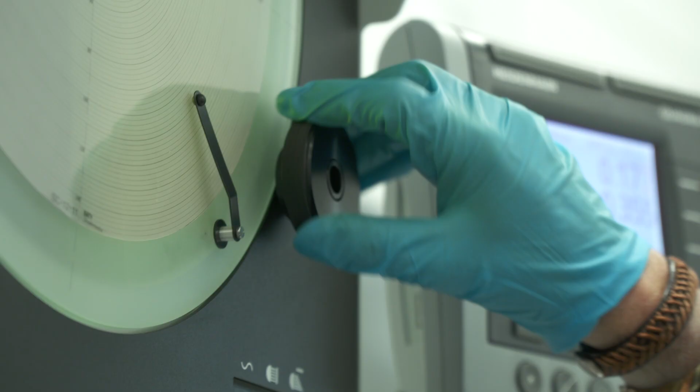Materials Solutions has grown considerably from its origins in a laboratory in 2006, and particularly so since its 2016 acquisition by Siemens. Having joined forces together, it's realizing the commercial possibilities of an emerging technology.

Materials Solutions is a world leader in additive manufacturing, a layer-by-layer based manufacturing process. For the past 10 years plus, both Siemens and Materials Solutions have been working in additive manufacturing of metals.

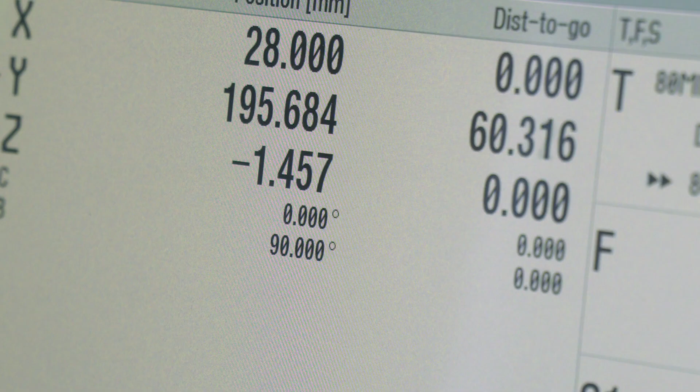People weren't sure if it was capable. We have good data that says we can use this process, we can design components, we can produce them and apply them into challenging environments, be it gas turbines or jet engines or rockets.

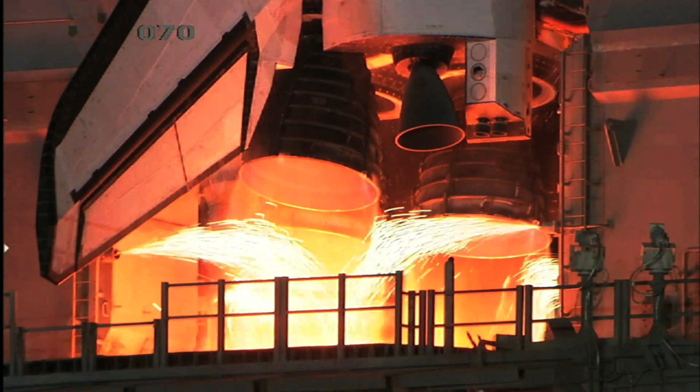We take a unique approach using our global reach and our global talent pool of employees around the world to really drive this technology. We've developed the proven applications, know-how and supply chain for work with the world's most advanced engineering companies in a broad range of industries.

Additive manufacturing is a game-changing technology. It can be economically competitive against conventional manufacturing because it allows you to manufacture components that you wouldn't have been able to do conventionally with enhanced performance or functionality for their end use.

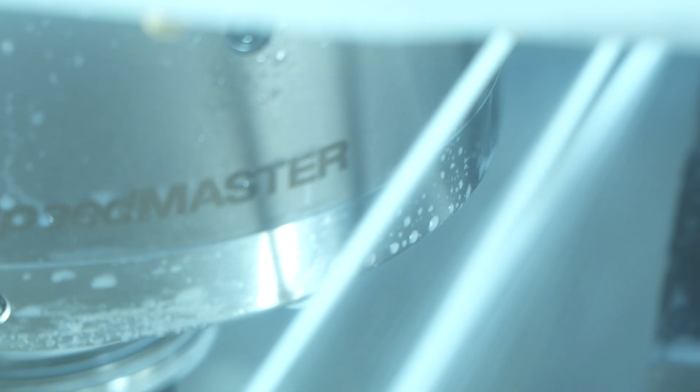We're now in serial production, and it's turned into a viable digital end-to-end process. We use this technology for repair of gas turbine parts, for prototypes, for manufacturing serial components.

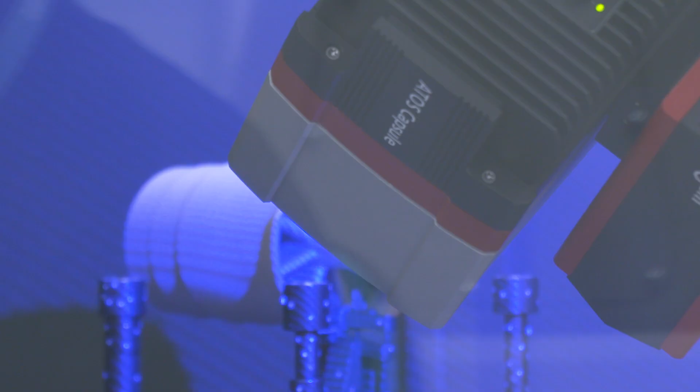Our customers are as confident as we are that the components we make will meet their needs in even the harshest environments. Examples are safety roll hoops that we use for racing cars and parts for gas turbines, including combustion components and non-rotating components.

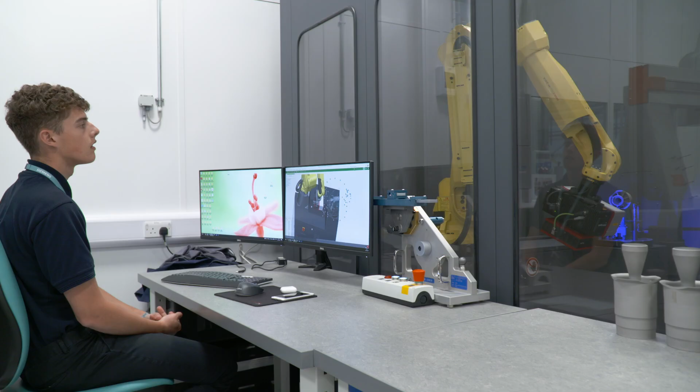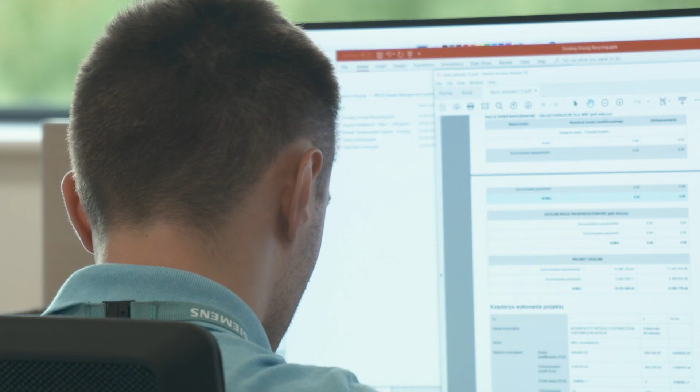The 3D printed parts are manufactured by Materials Solutions' new dedicated AM factory at its base in Worcester, where it employs 45 staff and provides third-party services in manufacturing, print and design, consulting, and training.

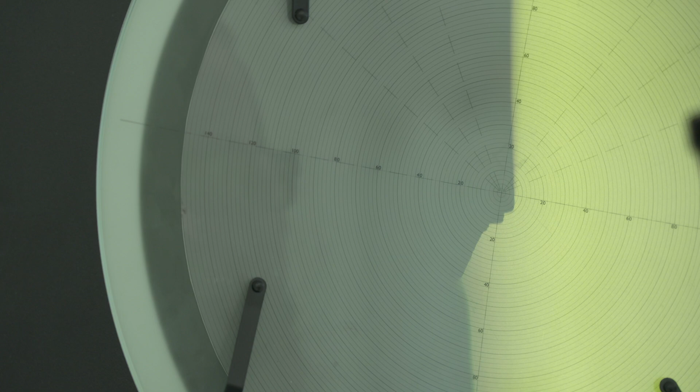It's very challenging taking this technology or any new technology from the lab into a serial production that's now established and respected. We used very thorough inspection techniques, including CT scans, to make sure that the design community and the engineers were 100% confident that the product is of the highest quality.

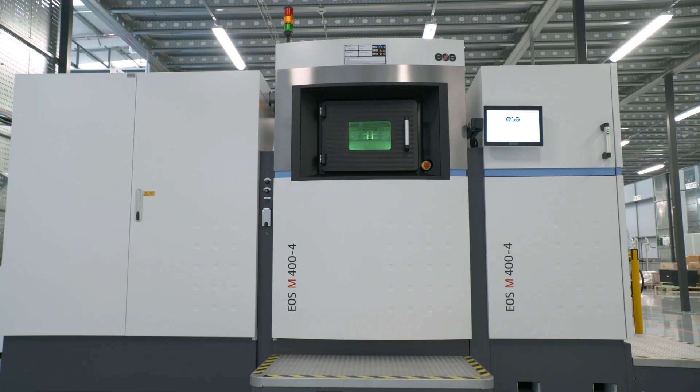We are redefining the roles and the processes that we use to allow us to take this process and fully industrialize it. It's a very innovative, progressive company which provides a challenging environment to develop our employees.

We are working on developing the mindset from the classic laboratory environment to one of productivity, focusing on cost and quality. With new bases in Europe and the US, Materials Solutions is collaborating closely with Siemens Digital Industries for large-scale growth and innovation.

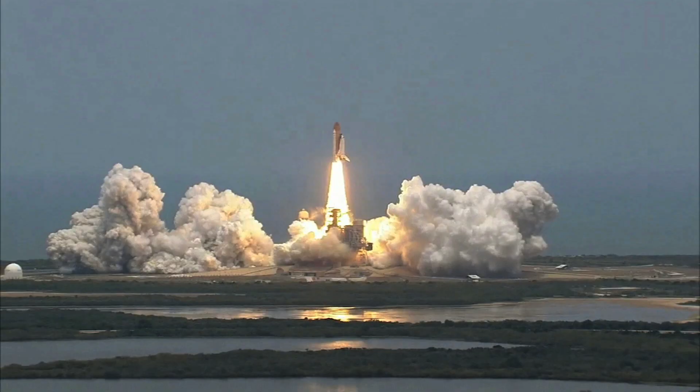We've learned what it takes in order to get the best out of this technology. It feels like we're at the tipping point in terms of getting our customers on board and getting the products out there and really driving this technology out into the marketplace and solving our customers' complex challenges.